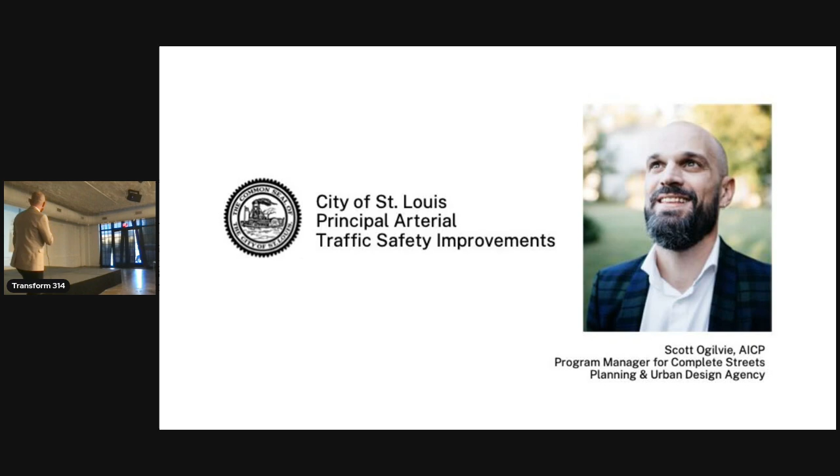So my name is Scott Ogilvie. I work for the City of St. Louis Planning and Urban Design Agency. I primarily work on transportation planning and transportation projects, also some land use things related to transit.

Kelly invited me to talk about the transportation projects that the city has funded primarily through the ARPA funding.

So the American Rescue Plan Act is a large allocation of federal funding. City of St. Louis got a pretty healthy allocation of that funding, which we're very pleased about, somewhere north of $450 million.

These transportation projects account for about 10% of that total funding. So $46 million is what we'll be talking through here.

But this does not represent all of the projects the city has right now. We have lots more projects, which I'll touch briefly on at the end.

So the umbrella term for this project is City of St. Louis Principal Arterial Traffic Safety Improvements. This is basically 6 corridors from west to east.

It's Goodfellow, Union, Kingshighway, Grand, South Jefferson, and some streets downtown, Broadway, 4th, and Washington, where especially during the pandemic, we had significant traffic safety and reckless driving activity going on.

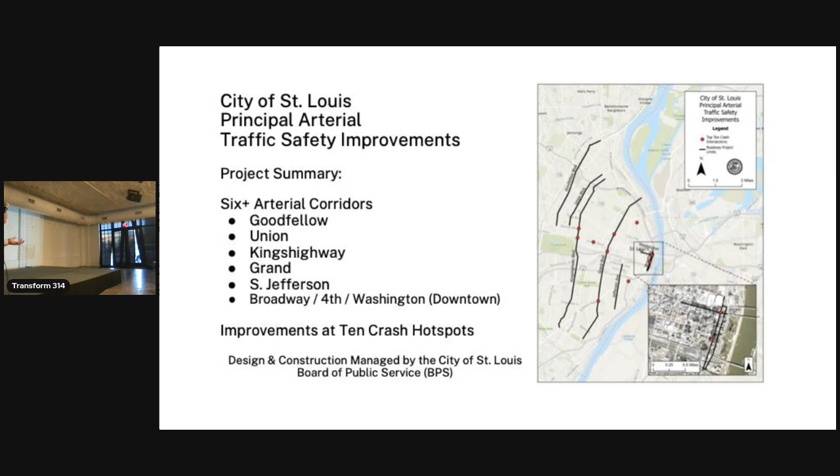Overall, 46 million, which I mentioned, is a little bit more than 30 miles of streets on these corridors. This is something we as a city almost never get to do. We never get to go out and repave a whole street from beginning to end.

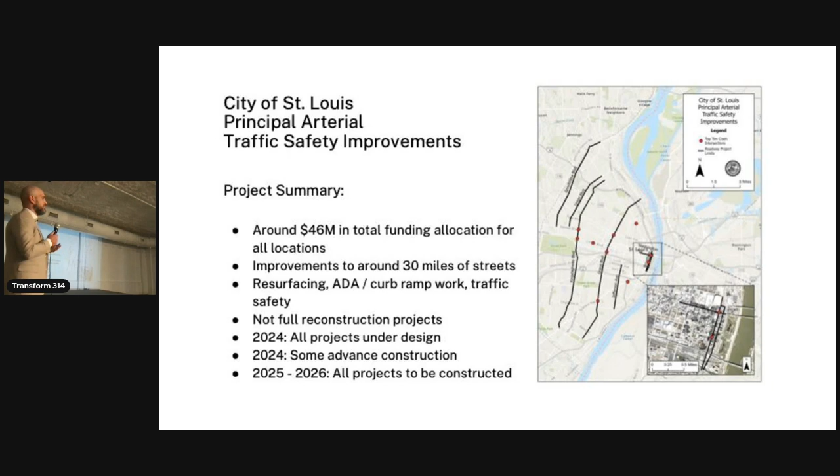We were very frequently just doing little bits here and there, 6 blocks here, a half mile over there. As Bethany mentioned, we rely not exclusively, but primarily on ward capital for funding for repaving.

A lot of times that's a ward by ward process. And these arterials cross many wards, and they are also the most expensive streets to make improvements to. It's much cheaper to make improvements to a neighborhood street compared to a major roadway.

Common across all these projects, they're all getting fully repaved, so that's the big thing. They're all getting ADA and curb ramp work. When I say ADA work, I mean making the curb ramps at the intersections accessible.

Some of these corridors will also get some additional sidewalk work in certain locations. But I will stress that these are not full roadway reconstruction projects.

Has anybody driven on North Jefferson and Parnell recently? Yes. So we recently just completely rebuilt that roadway. Everything is new - sidewalks, lighting, traffic signals, pavement, new trees, new landscaping. That's a level above these improvements.

Those types of improvements are going to be like $10 million or more per mile. Here we're more in the $1.5 million per mile range.

So we are fixing what's out there to the extent we can with the funding, but we are not completely rebuilding everything. And on to schedule.

Everything's under design right now. We're most of the way through the design. We will be wrapping up design on all these corridors in the next few weeks. Most of the work is going to be done in 2025. We also have 2026 - we have to expend the funds by the end of 2026.

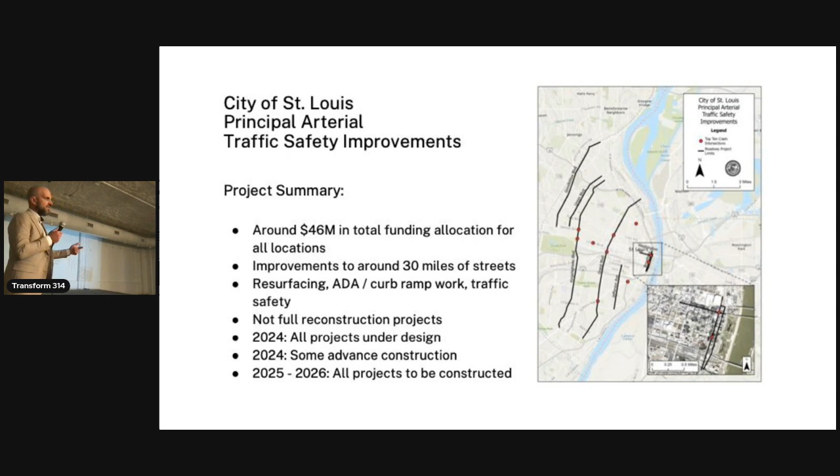And some has actually started. If you're on North Kingshighway, north of Dr. MLK, you've seen curb replacement, sidewalk work, ramp replacement. That's part of this, and that's kind of the first work that we've been doing with this funding.

So I'm going to run through, again west to east, all the projects, just give you a little project detail on each corridor. If you're really interested in one of these, stop me as we go.

So there's a lot of similarities, but they're all unique corridors. They're each being designed individually. They will share some features, but there are some distinctions between the corridors.

So for Goodfellow, we're resurfacing that from Delmar to Halls Ferry Circle. There will be parking lane bump outs - I'll say that a bunch, so let me explain what that is now.

You know what a parking lane is? On-street parking, about 8 feet wide, you put a car there. When that lane is not occupied by a vehicle, what happens a lot of the time?

Somebody uses it to drive, to pass on the right side, to speed. So a lot of these projects will be filling in certain of those spots with little bump outs to make that driving behavior less appealing.

Especially near intersections - you want to keep cars away from the intersection for visibility, both for drivers and others.

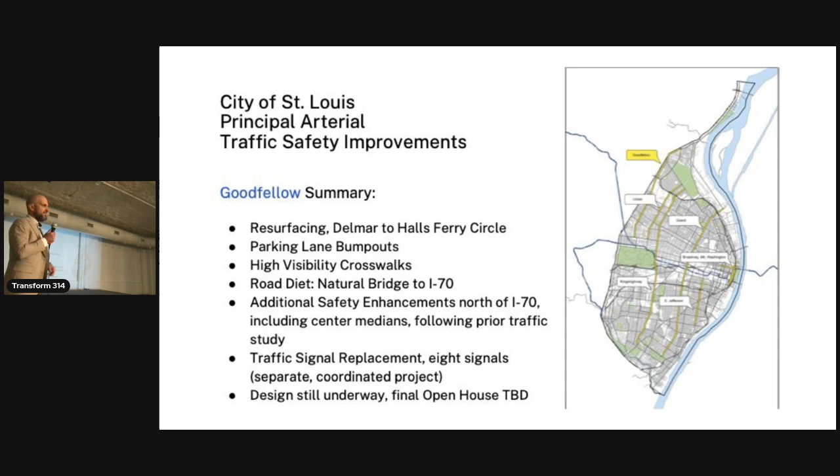These are a little hard to see. One feature I didn't mention, you guys know the really wide segment of Goodfellow that's south of I-70 and north of Natural Bridge. It's super wide, it's the widest street in the city of St. Louis. Is this ringing a bell? The Federal Center is on it, yeah. You couldn't do it, it's impossible. You probably could. It's like 100 feet wide, which is much wider than it needs to be.

So that segment is tough, because if we were going to rebuild that, we would rebuild a totally different street. But since we're working with the existing curbs, we want to shrink the street to the extent we can. So there we're going to do what we call a parking protected bike lane. That's an image of Union, but we're going to do something similar where we move the parking away from the curb, build some concrete medians, and the bike lanes will be against the curb.

Is there a lot of biking on that section of Goodfellow now? There's not, but we're trying to do something to eat up some of the roadway space to make driving safer and to make it safer for anybody using that corridor. If you're walking, the sidewalk is small, you might be right next to vehicles, so this moves the vehicle away from the pedestrian. And if you're riding a scooter or pushing a baby stroller, maybe you just do it in the bike lane because it's smoother, it'll be freshly resurfaced rather than the sidewalk.

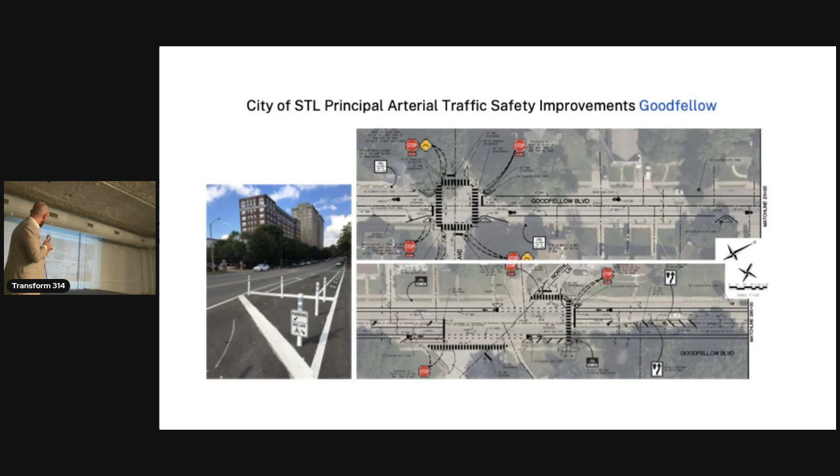Union. Union is probably the lowest volume and narrowest of these roads overall. So it's getting resurfacing, Delmar up to West Florissant, parking lane bump outs again, high visibility crosswalks. Right now the bike lanes on Union go from the park up to Page, so we're going to extend them from Page to Natural Bridge with this project. It also gets curb ramps and ADA improvements at all the intersections. We have the open house for this one scheduled for next Thursday if you want to see it in more detail.

I can tell you where it is. Hold on, it is.

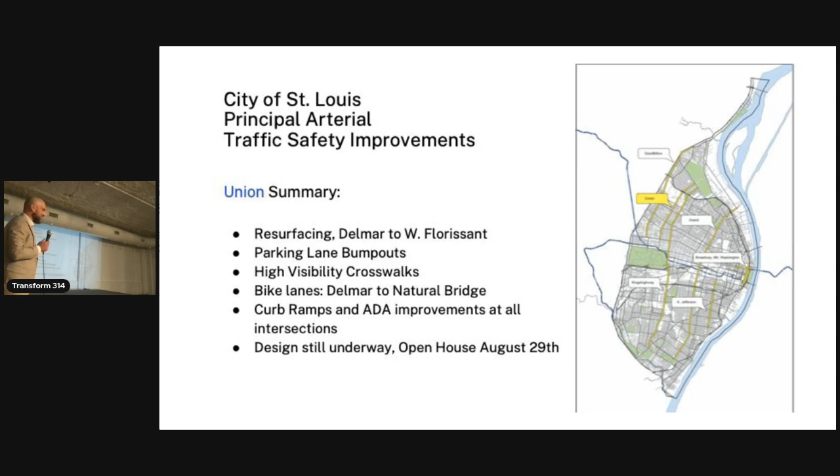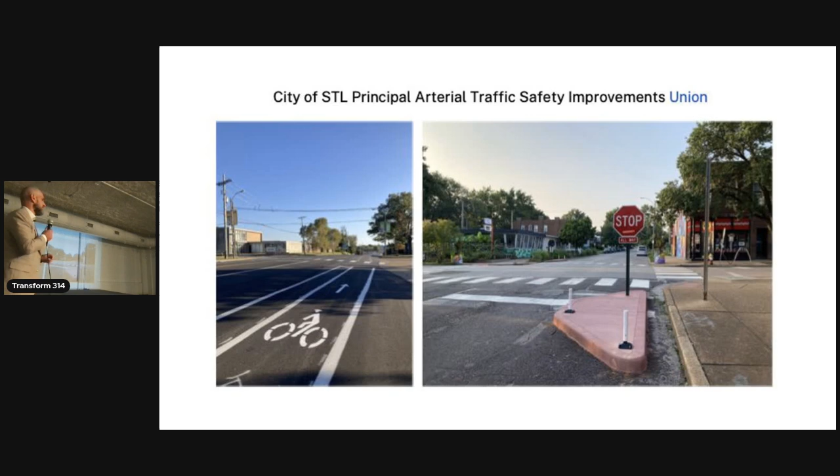So that's an image of a lot of those parking lane bump outs we'll be doing. That one's on Arsenal in Benton Park, but they'll look a lot like that. In some cases, if they're at an intersection, we like to put the stop sign on them because it makes the stop sign more visible. But they'll also be kind of mid-block, just taking up space in some locations. And then most of the bike lanes will be conventional bike lanes in this stretch because we don't have room for parking protected bike lanes.

Slide. Kingshighway. The next two are the big ones, Kingshighway and Grand. They vary a lot through the corridors. They're long corridors, 9 miles each. So we're doing different things in different parts of these corridors that are context specific to the amount of traffic and to the adjacent land use.

So the whole thing's getting resurfaced. The whole corridor will be ADA accessible, all the intersections at least, and that's a big deal. If you're riding a bus, if you're using a wheelchair or other mobility device, there are lots of places where you encounter a lot of difficulties in St. Louis, just using the sidewalk or navigating an intersection.

So really happy to see the whole corridor end to end be ADA compliant. At the south end, we're doing a road diet, adding some bike lanes where the traffic volume is much lower.

A big part of this project - two big parts actually. One big part, and this is something Christy was talking about, we had a real safety issue from Lindell up to Dr. MLK, so that segment is getting more funding so we can do more improvements. There'll be a road diet, a center median, and a variety of traffic calming features, hopefully to get vehicle speeds down.

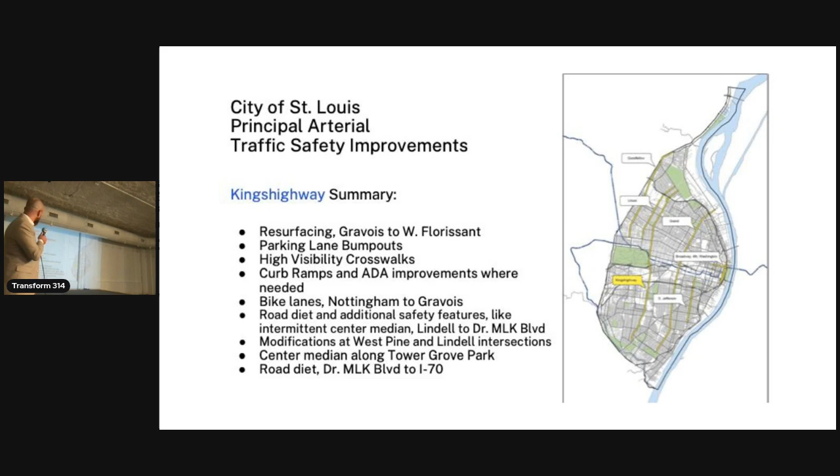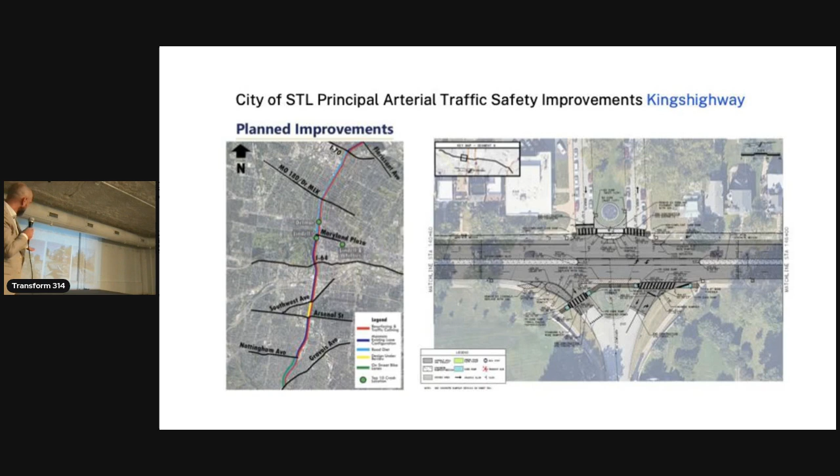Slide. Okay, those are hard to see, but on the right you can see that median adjacent to Tower Grove Park, with some modifications to the entrance. We'll go to the next slide. And here you can see some of the stuff already under construction on North Kingshighway. Next up is Grand.

One of the super exciting things about Grand—and this is a Christie thing too—North Grand is really high on the list on the high injury network for fatalities and serious injuries. So we were resurfacing Grand, but we get a bonus on North Grand because Great Rivers Greenway, in cooperation with the city, are both funding this project, building the Brickline Greenway on North Grand.

It's a super cool project. Next year we'll be repaving all of Grand, but the Brickline will also be under construction at the same time, and that's a full rebuild project. So everything, the whole right of way, will be taken from the very insufficient state of that road now to as nice as you can make a street, I would say. It'll be safer, it'll look tons better. There'll be a multi-use facility—bikes, runners, just public space for people. And that is also just one of the most unsafe stretches of road, so it should become much safer for everybody using it. That's a huge highlight.

Then north of there, this project is going to allow us to build parking protected bike lanes to extend the connectivity along the east side of Fairground Park, and then continuing north to the Hyde Park Water Tower, then Hall Street. You can actually access the Riverfront Trail from Grand and Hall Street right there.

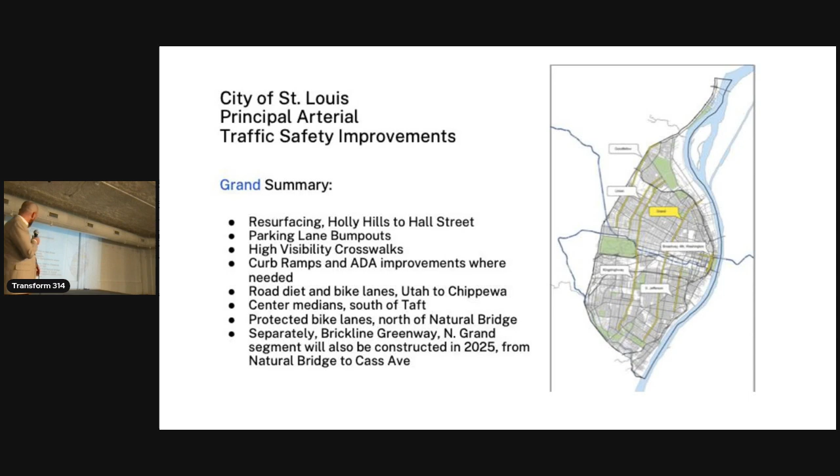I think we're hopefully going to do some cool bus stop markings on this project. Grand, as you guys know, is probably the highest ridership bus route, best service—not as good as it used to be, but hopefully coming back to more frequent service. So we want to highlight where those bus stops are and make sure drivers don't park in them and block the bus stop. Hopefully we'll do some cool bus stop markings through this corridor.

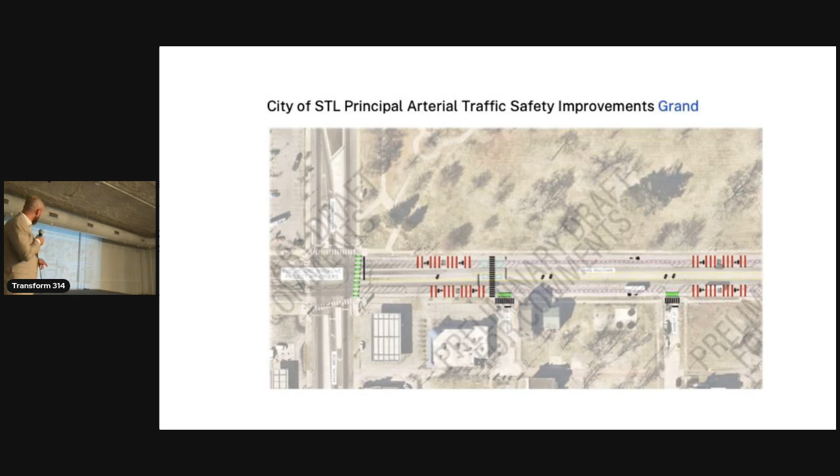This is a slide of the Brickline Greenway. We could do—maybe you have done, I don't know—a whole session on this project. They'd love to come talk to you about it. But it's just super cool. You can picture North Grand in your mind right now.

So just to run through: new landscaping, new trees, sidewalk, kind of a planting strip that'll be between the sidewalk and the multi-use trail. The multi-use trail will look a lot like the segment that's right by the MLS stadium on Market Street right now, with the same kind of brick line detail down the middle. More landscaping, these big landscaped bump outs at the corners, road diet so it'll be 3 lanes, and much safer to cross Grand—it'll definitely have a traffic calming effect.

We would love to be able to do this type of project everywhere. We can't do it everywhere because it's like $25 million a mile, and we've got 1,300 miles of street in the city. That's what it takes to go from zero to hero on your streets. But I think this is the best work we can do, and we can also take elements of this type of project and put them into other projects, even if we can't do the full thing.

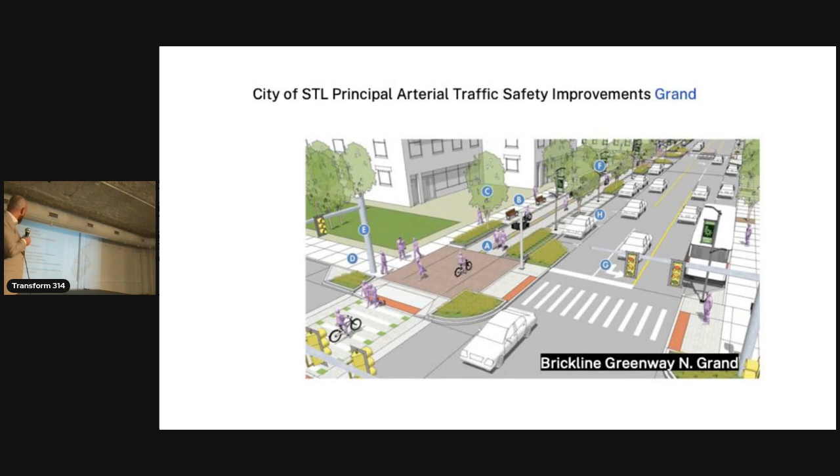Next slide—South Jefferson. This is the most boring one. South Jefferson is also the line for the future Metrolink Green Line expansion, so we didn't want to go too far on this project because it's kind of an interim resurfacing, since the city is working very hard toward accessing federal funding to try to build the Metrolink Green Line. That'd be a great session too, Kelly. So it's just resurfacing and some safety improvements on South Jefferson.

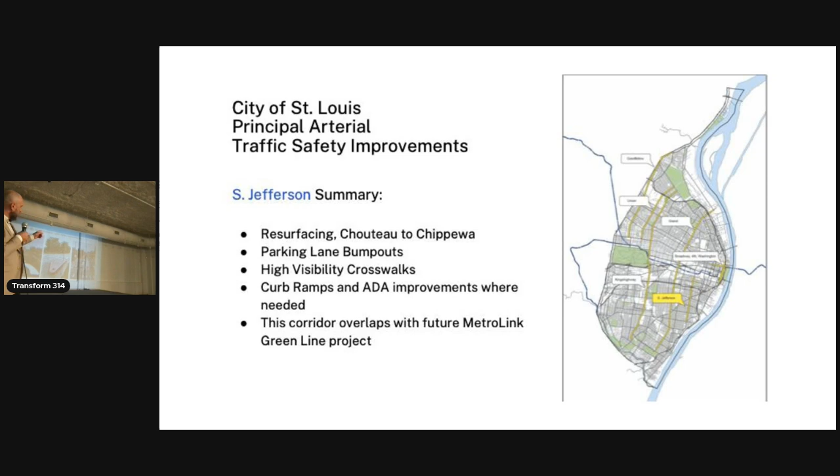One thing I will point out: we've got a bad intersection at Gravois and Jefferson, so there will be some safety improvements there. There's some dead space that's like a center turning lane, but it's not actually a turning lane, so we're going to fill it in with medians to make the crossings safer. Hopefully we'll also have a safety project on Gravois just east of here.

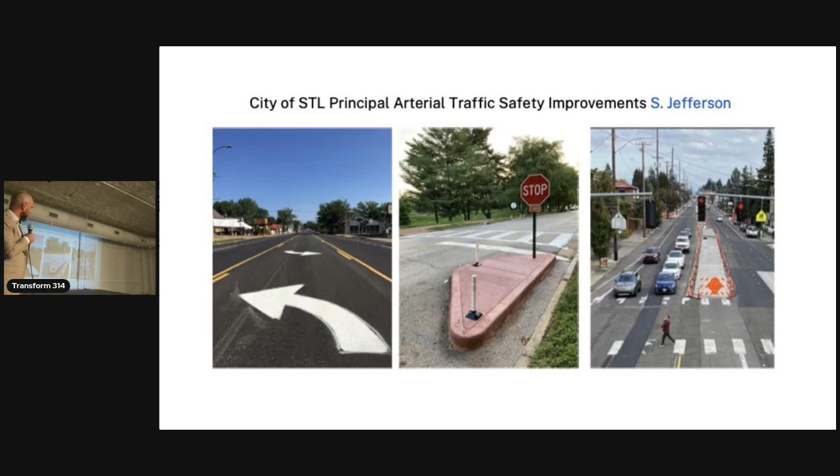Oh, I forgot downtown. Okay, downtown: 4th, Broadway and Washington. 4th and Broadway is a pair of streets. 4th goes north, Broadway goes south out of downtown.

So we're going to add a cycle track on 4th Street. That's a 2-way bike facility, so there'll be one less vehicular lane. This will be protected by a concrete median, taking you in and out of downtown from the south.

Broadway, the next street over, will get a road diet with a lot of bump outs. It's just very wide, and traffic volume is down since the pandemic. Rush hour peaks aren't what they used to be, so these streets are too wide, and especially at night you get people driving crazy. So we're going to try to slow them down a little.

And then Washington—there's periodically, I think it's a lot better than it was a few years ago, but some reckless driving behavior. So Washington's getting some updates, and we're doing a raised intersection at Washington and 8th, in front of the convention center, where there's a lot of pedestrian activity. The convention center worries a lot about pedestrian safety there.

So we'll raise the intersection up, so the whole intersection is like a speed hump. Hopefully that slows vehicles down and makes it a prominent location that drivers respect, and we're doing some other safety improvements there too. So those are our $45 million of ARPA-funded street improvements.

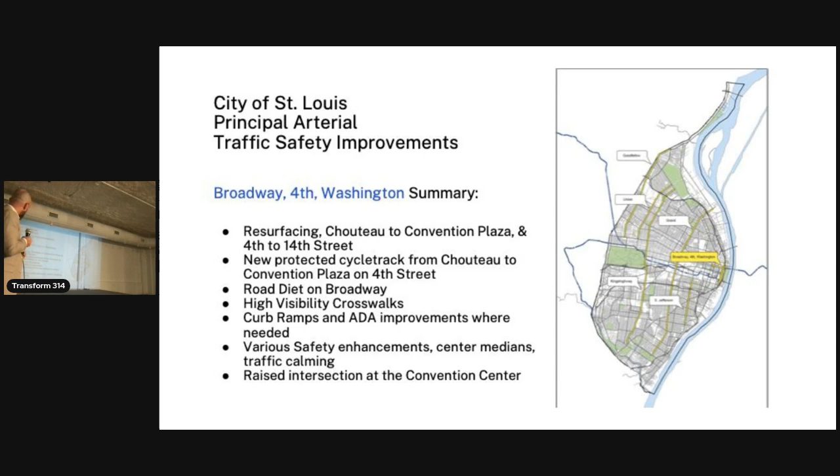Next slide—oh, you can kind of see the cycle track there. Next slide.

The hotspots—we're also doing these spot improvements throughout the city. I mentioned we picked these based on high vehicular crash or pedestrian crash locations. These are basically intersections where we either did or did not have a corridor project and thought needed help anyway. So some are on the corridors, meaning we get to put a little more money into those locations. Some are off the corridors, but we'll do some spot improvements there.

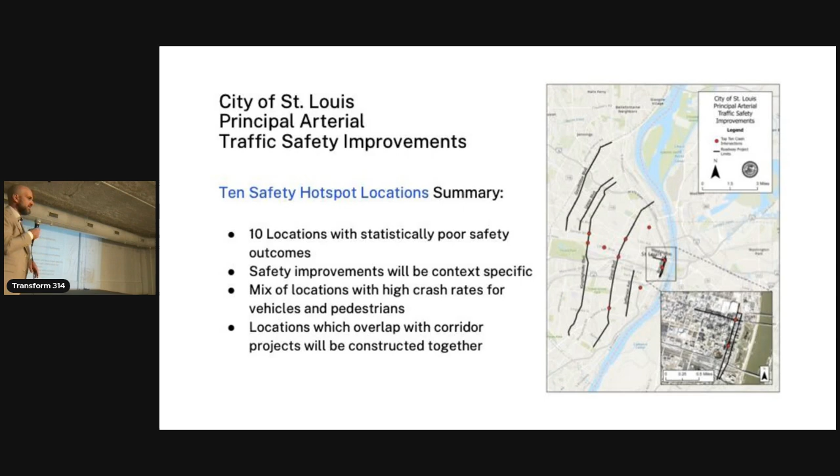So this is kind of a sidebar—I've got 3 minutes.

We put up a really nice map recently of all the city's major transportation projects. I think we still struggle to communicate what we are doing, but we have a much higher level of investment in projects right now than we did 5, 6, or 7 years ago. We want to tell the story about those projects and let people know they're happening, because we fund them, and then a lot of the time it takes several years to actually build them.

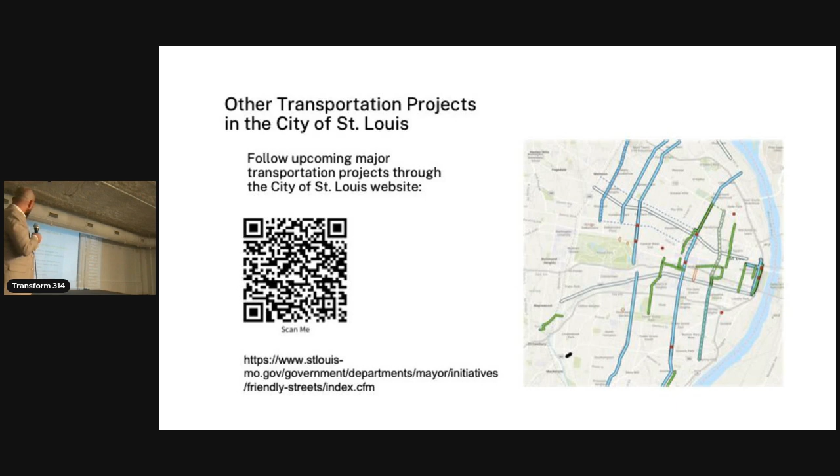And then I've got a couple slides about some of the stuff on that table. The city, also funded by ARPA, is doing a citywide transportation mobility plan. It's very exciting for me because I work in planning. Does anybody know—does the city have a transportation plan? No, we don't. Very unusual for a city not to have a transportation plan in 2024, or 2014, or 2004.

So we're finally going to get one. We haven't really done this since like the 60s, when we were building highways, and the transportation paradigm is different now. So the big thing—this isn't so much about projects.

We've been talking about projects, but this isn't really about projects. This is about what we want to do with our transportation system—what are the values, what's our vision for it, what are the goals, what are the things we care about. When I say value, it's like: do we care about roadway capacity more, do we care about safety more, do we care about building new things more, or do we care about maintaining the stuff we have more?

So this is a chance to talk to residents all throughout the city and get their sense of these basic things—what are people's priorities. We're doing that right now. There's a statistically valid survey we're doing right now, and then we're going to put that up online so you all can take it once we get enough initial responses.

We've got 4 open houses coming up, which are on the next slide. Nope, they're on the next slide, but we'll stay here.

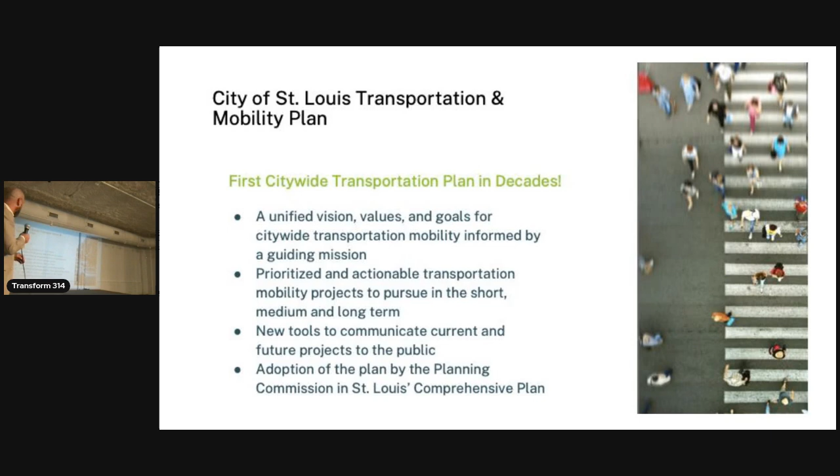Just some highlights: values, vision, goals. We've been doing a lot of interviews with city staff at the beginning of this process, so they know about it and can give us input into it.

We're working on a policy and ordinance review. There's lots of policies and ordinances that touch on transportation or transportation funding in some way, so we're working through those. We're also working through a street design guide that forms a baseline of what different types of streets in the city, and what the ideal version of those streets looks like.

We're building off of the safety action plan, taking all of that data - the data Christy was talking about. We're already getting our first project from that teed up, which I can't talk about in detail yet, but it's great data, that project is really good. We're going to build more into it in terms of what the city can do to respond, and that'll go into this TMP, Transportation Mobility Plan.

We had our first community advisory meeting - Mr. Stringfellow, there he is, yes, he's on the committee. We're really in the gathering input phase right now from the public, and then later in the fall and winter we'll get into really plan development and writing the plan.

But now is when, if there's something you care about, you can go online and tell us right now. Check the TMP website, take that survey that's coming up, and go to the open houses. Now I'll go to the next slide.

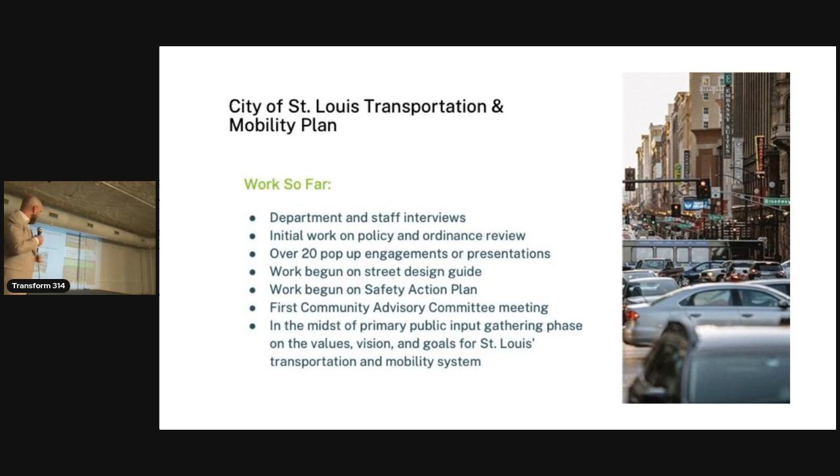So we've got 4 open houses, we've got paper copies over there, and they're on the website too. This is just a chance to come through and talk to the project team about your goals and hopes and dreams for transportation in St. Louis, and we hope you come. First one is the 21st, I think. We've got a Central West End Forest Park one, a downtown one, a north one, and a south one. You can come to all 4 if you want, but they're coming up late September, early October.

Is that it? Yes, okay. Thank you guys. Yes.